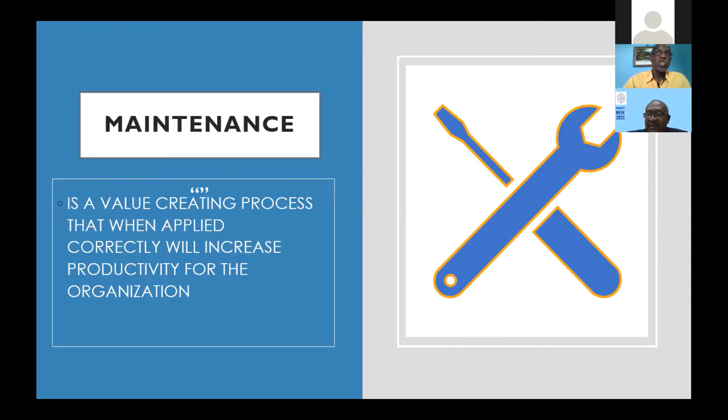Maintenance is a set of activities carried out in order to keep a plant, process, or equipment, well, I use 'in service' here, but not only in service, but at its optimum performance level. If I take a typical production plant, whether it's a bakery, a fish producer of mackerel, sardine, or you're producing my favorite brew, beer, the plant has a performance level.

With a critical piece of equipment in a bottling plant, it produces around 600 bottles per minute. A typical pump will be producing maybe 200 gallons per minute at 40 or 60 psi. You find that without maintenance, these equipment will fall below these performance targets. Someone will say, well, it is running, but a failure occurs on a piece of equipment when that equipment is performing below its performance standard.

Yes, over years, as years go by, the machine gets old. So if its design parameter is 600 units per minute, after maybe 10 or so years, you might have to derate it to about 500 or 550 units per minute.

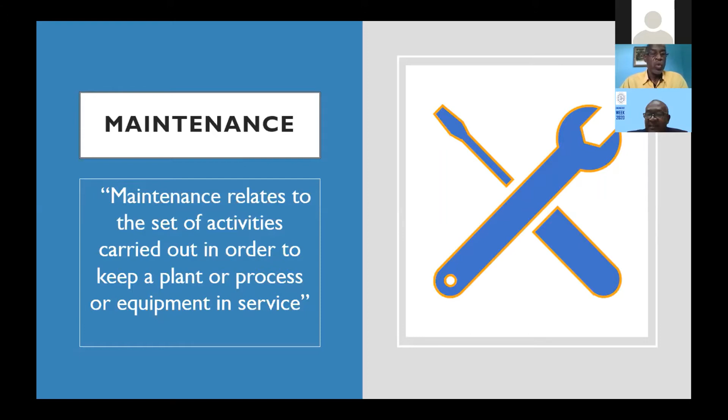Having said that, let us look at the different types of maintenance before I go into this tool, overall equipment effectiveness. Under the maintenance umbrella, as you see it, you should strive to achieve less than 20% breakdown maintenance in your organization.

And there are some items in your plant that you can deliberately run to failure, because if they fail, they will not influence the production process. So including those and other stuff, you should try and achieve less than 20% breakdown in your maintenance.

On the other side, you have planned maintenance. Try to make your planned maintenance greater than 80% of your overall maintenance.

And you see we have preventative maintenance, which speaks to condition-based. Herein, you would look at the machine to see what condition it is in. There are also some scientific devices that you can use to do some measurements, whether it's oil sampling to see the level of degradation in the oil. Based on the level of degradation, you know that a failure will soon be happening. Or you do a vibration analysis on a pump, and based on the level of vibration, you can predict that a failure is going to happen.

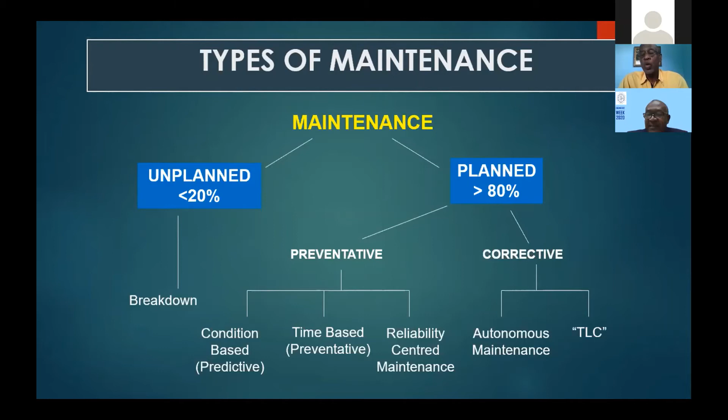On to the other side, TLC - some people construe it as tender loving care, and yes it is, because once applied, the machine will give you increased availability. It's tighten, lubricate, and clean. If you keep the machine clean, you're able to inspect. Once you're able to inspect, then you're able to detect if a failure is going to happen. And having determined that a failure is going to happen, you are now able to institute a corrective measure.

So having given you an overview of what maintenance and its objectives are, and some of the activities under the maintenance umbrella, I wanted to ask a question: how effective is your maintenance program? Are the equipment, the process line, or the plant producing at its optimal level?

Overall equipment effectiveness is basically an international tool used to make this sort of assessment. It's a global standard of measurement for equipment, process, and plant effectiveness. It reveals equipment's true capacity. It tells you if the equipment, let's say the filling line, is supposed to be doing 600 bottles per minute.

At the end of the day, you can do an assessment - how much have you produced? Is it performing at the level it's supposed to be performing? So overall equipment effectiveness is a measure to evaluate the productiveness of a machine or process area.

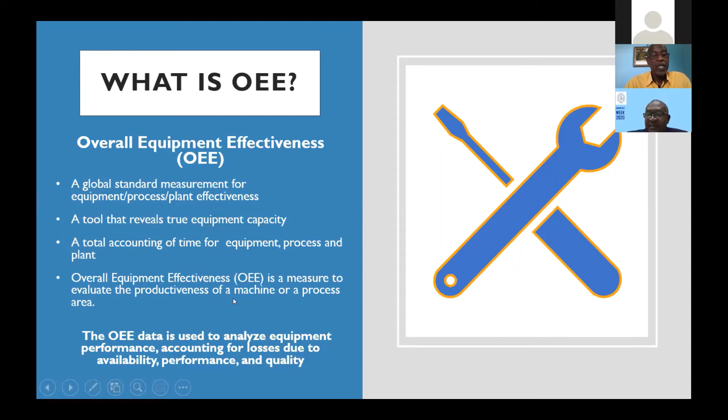Once you're able to apply this tool, you'll find that you have significant benefits to the organization. There's a terminology we use in world-class manufacturing known as QCDSM - Q, quality, cost, delivery, safety, and morale.

If you are able to apply the proper maintenance regime, do your OEE assessment, you will improve the output of the facility, improve quality, reduce costs, and deliver your products. There won't be shortages on the market - whether it's bun, Bulla, Red Stripe, or Heineken - because you're using all the available time, producing goods to the quality standard, and delivering them when the customer needs it.

Having achieved those, what you find is that you have a much safer environment because you are now less reactive and more proactive in doing your work, and you find that employees have a high level of morale.

So from the company perspective, the company will understand that OEE provides a true view of the capacity that is available. Improving OEE frees up capacity to be utilized more effectively.

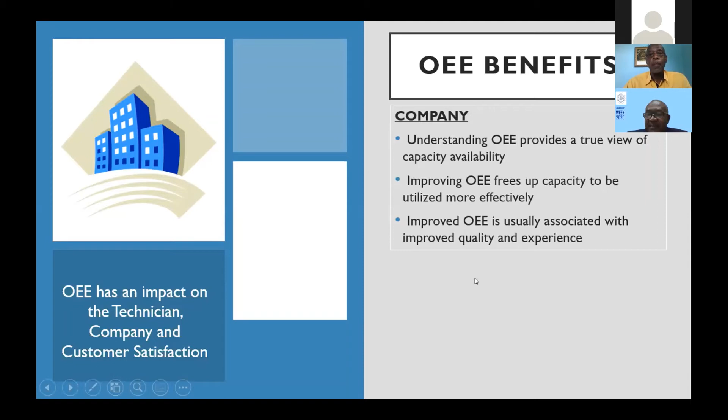From the technician side, it informs the operator of current machine process conditions and enables them to identify major losses, reduce lost time, and maintain a more productive machine.

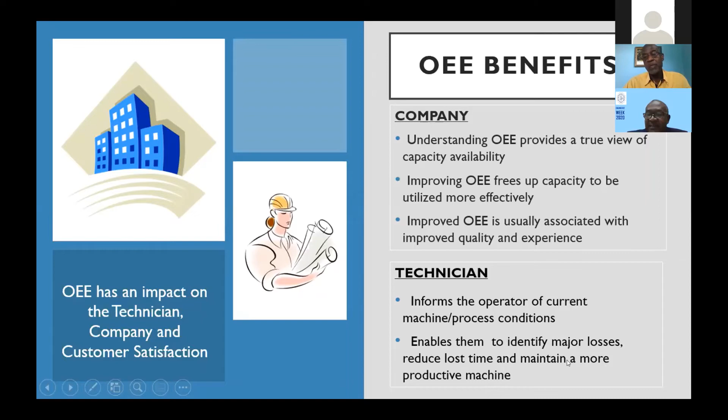But for that production, you have some maintenance activity to be done, planned maintenance activity. So you subtract that time from the 480 minutes, which now gives you the available time.

But having started to run the machine, you have stuff like changeover, startup issues, ramp up, ramp down, adjustments, and small repairs, small stoppages. That now reduces the time that you have to produce.

At the productive time available, you have issues around machine speed because maybe there's a shortage of materials, or in the process line, there's a piece of equipment that is not producing at its optimal level, and so some of the machines have to be retarded, resulting in lower yield.

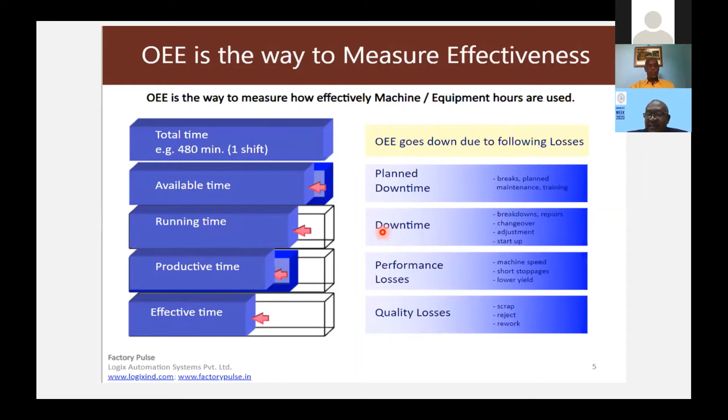All right, let us look at the machine losses that we can have in our system. Availability. OEE looks at 3 components: availability, performance, and quality.

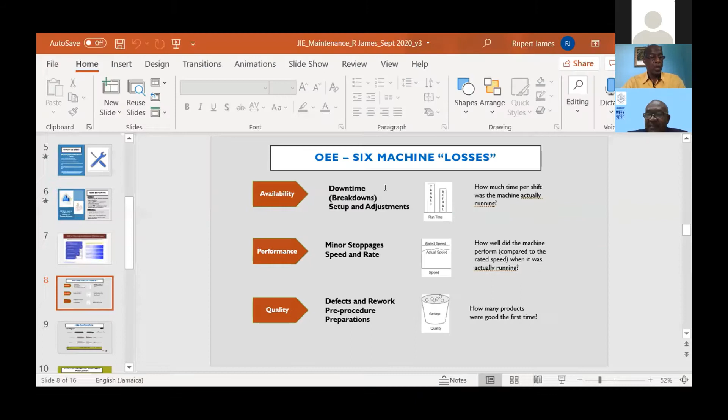Looking at availability, look at downtime, which involves breakdown, setup, and adjustment. You have the target runtime, you see being highlighted there, and because of the breakdown, these are what you actually achieve. You have minor stoppages or reduced speed. So this is your target speed, and that's what you actually achieve. How well did the machine perform compared to rated speed?

And then quality, defects, and rework.

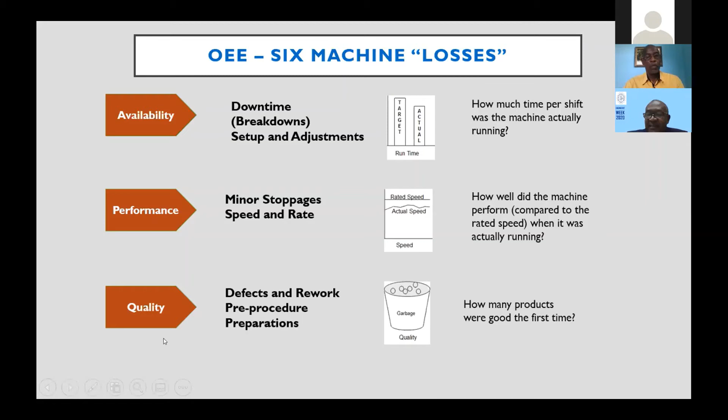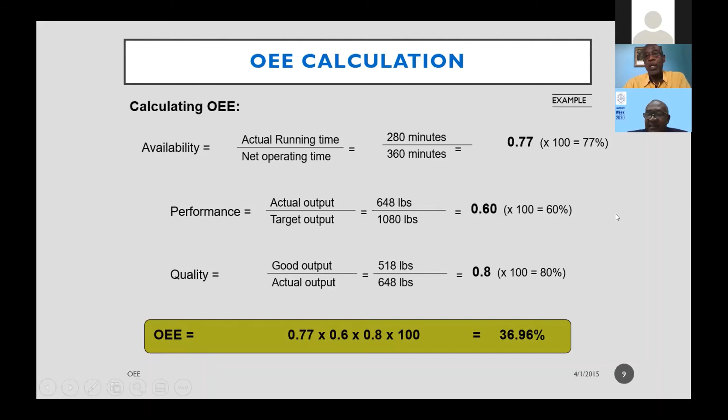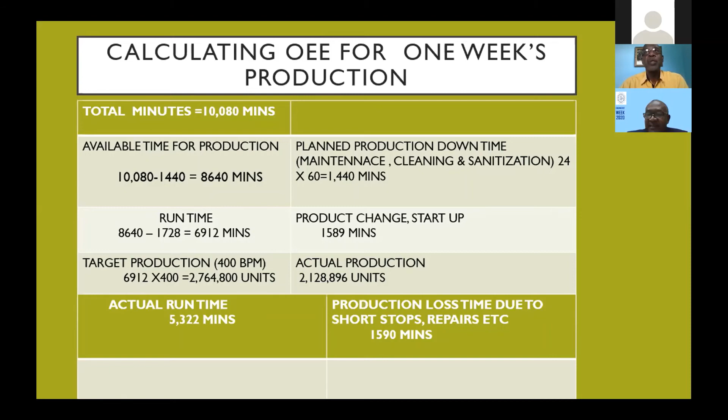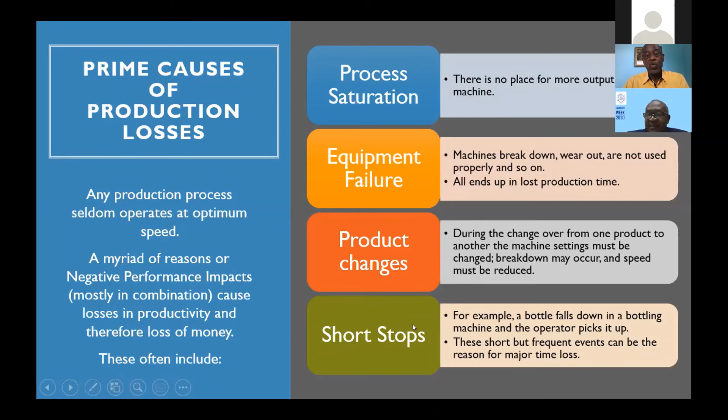Let us look at analyzing the 6 big losses, breakdowns. An example: adjustment of equipment to facilitate production process, machine shut down because of failure, and changeovers - machine stop because materials or setups need to be changed between product or SKU.

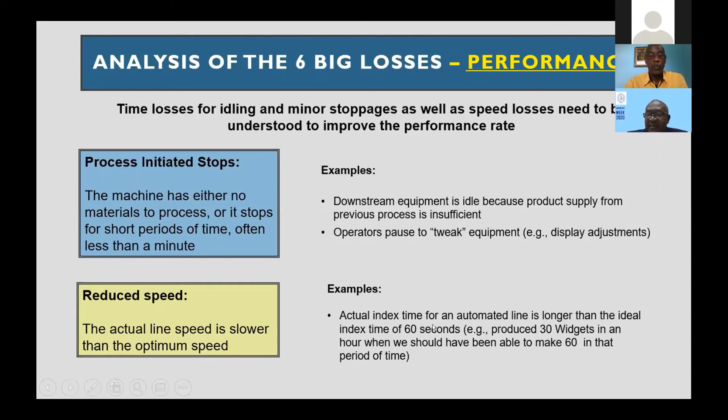Okay, so in doing a summary, OEE is... I just need to go back here. I said early on that an OEE of 36.96 or 37% is a very low OEE.

And so therefore we need to look at what is contributing to this low OEE, do the necessary improvement, whether it is machine availability, poor performance, or quality issues.

You can't have a performance of 0.6 in your production process. You should strive to have a performance above 0.85. Also for availability, in terms of quality, you should try to be at least 0.95 for quality. You can't be throwing away 20% of the products that you have produced.

So once you have identified the root cause that's giving you this poor performance level, then you can institute a corrective measure to ensure that you maintain the required performance target that you need.

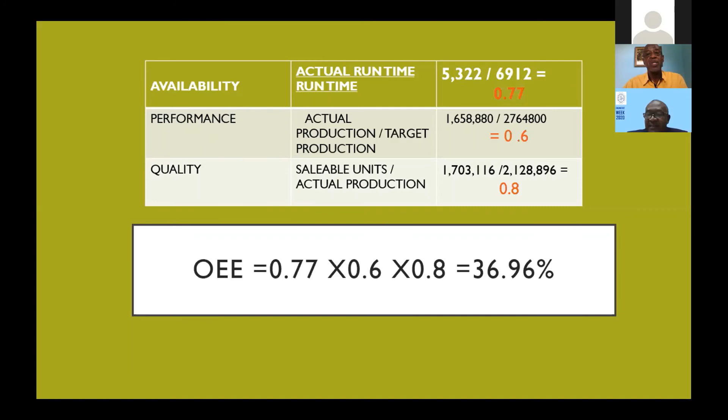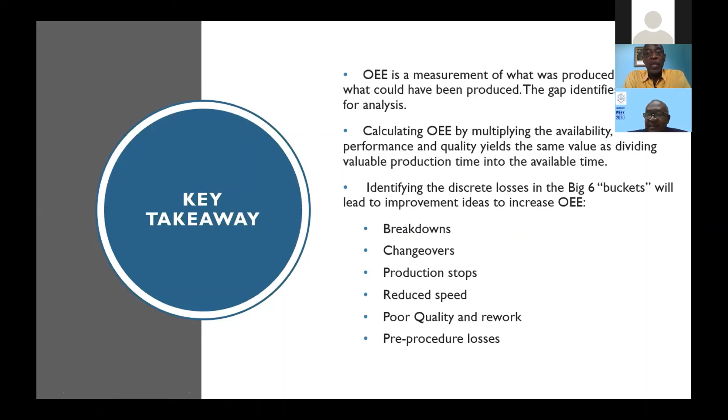So in summary, OEE is a measure of what was produced against what could have been produced. The gap identified all losses for analysis. Calculating OEE by multiplying the availability, performance, and quality yields the same value as dividing valuable production time into available time. Identifying the discrete losses in the big 6 buckets will lead to improvement ideas to increase OEE.